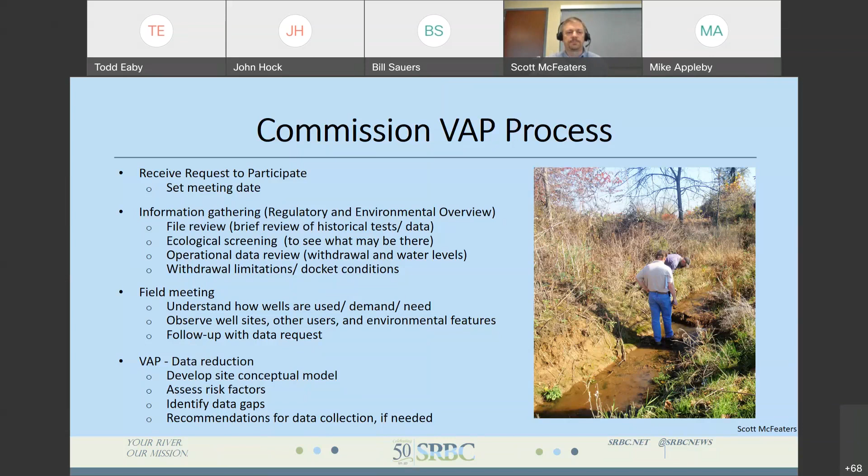So with that, we're going to start looking at some of our examples. We've put together 5 examples we're going to go over in detail today. We'll have about 8 slides for each of these examples in a similar format, to try to get you to think as we go through them. The first slide for each example is just some high-level stuff that we look at as we're beginning to prepare for the action plan development.

Site one, well one, was approved in 2008 at a withdrawal quantity of 130,000 gallons a day. From the initial information, this well is within an SRBC water challenged area. If you're not familiar with that term, we have a groundwater management plan that identifies water challenged areas and potentially stressed areas, because there may be some limitations to developing water. Unfortunately, this site does fall within one of those categories. It's just something we need to be aware of as we start this project.

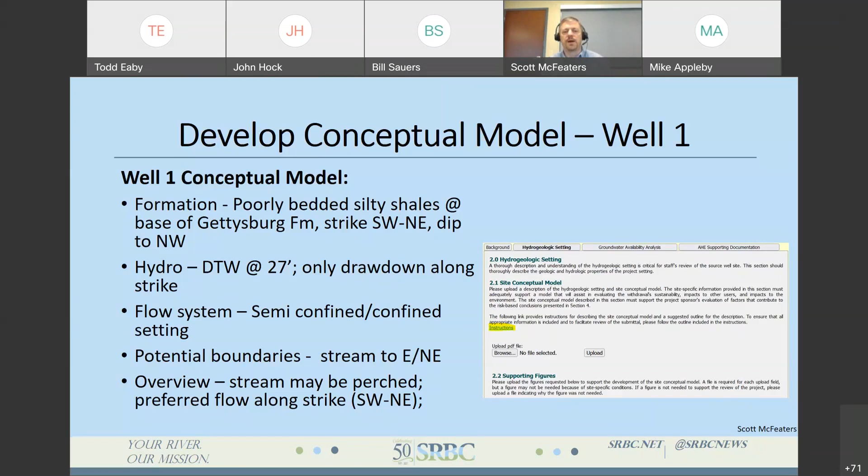As far as the flow system, it's important for this site to know that it was a semi-confined to confined setting. And we do have the potential recharge boundaries with the stream. So overall, we're just starting to develop our conceptual model, and that's important information to know as we dig in to

answer our questions. So the first risk factor we're going to take a look at is the sustainability of the withdrawal. And the first part of analyzing that is to look at a desktop groundwater availability analysis. And as I indicated earlier, there was one found in our historical files. So what we did is we pulled that information up, and we wanted to confirm, look at it, see if it still makes sense. And the one that was on file identified a recharge area of 0.86 square miles.

And the hydrogeologic report provided a description of how that was developed, and it was a structural basin that was defined by extending the primary water-bearing zone to the surface based on the known dip of the bedrock, and the area of influence was used to identify the topographic drainage that would ultimately be captured by the projection of that zone. So it was a well done recharge area definition, and we considered that to be acceptable.

Recharge rate used by the consultant was referenced in literature. We looked at that and confirmed that that was a reasonable value. And we've also looked at what other users may be within your groundwater contribution basin. The area is not highly developed in the vicinity of the well. There are some other wells, but there's also good coverage by the public water supply.

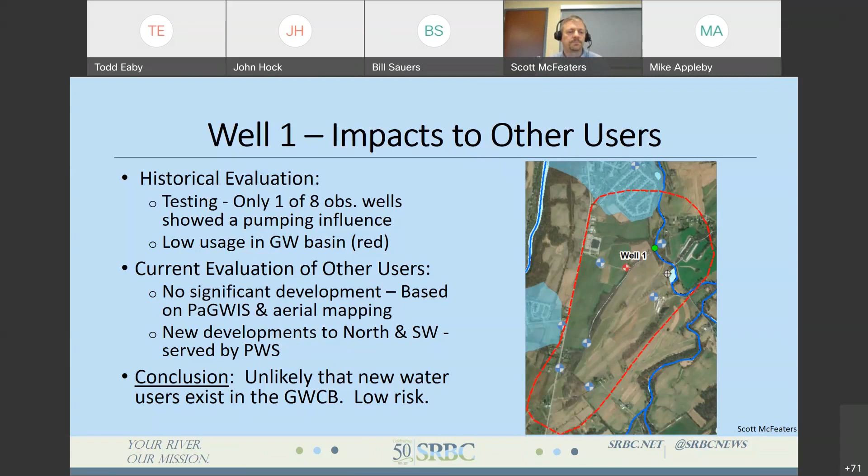So the third principal risk factor we're going to look at are impacts to environmental resources. As I mentioned, there is a stream nearby, there is a wetland nearby. The good news again here is that during that historical test, both were monitored and no impacts were detected. And that's an important piece of information to have as we try to rule out potential impacts to these features.

We also look at the state designations. There's no special protections for either of them. And the third area we check into is the rare, threatened, and endangered species through the PNDI search tool. And in this case, no species concerns were identified. So overall, again, there's a very low risk factor to impacts to the environment based on the information we have available to us.

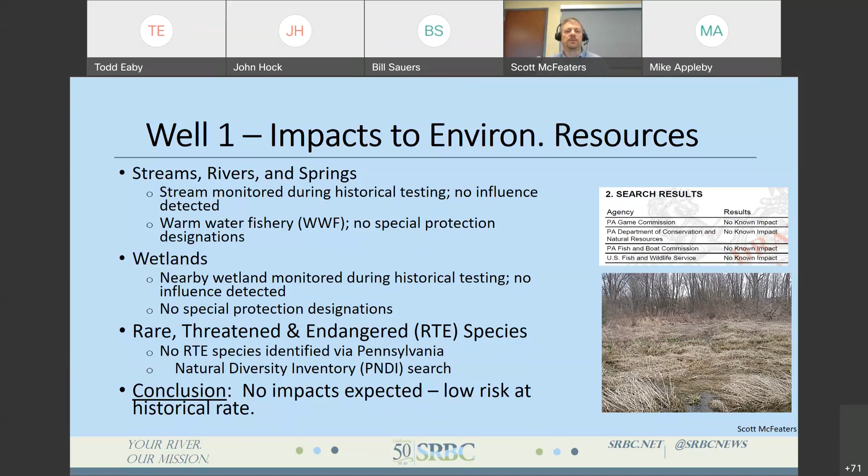So coming to the end of our data evaluation, we put up this summary screen. We've got the 3 principal risk factors. We kind of rank whether we have low, medium, or high risk. For each of these 3 factors, we've determined there's low risk. So what does that mean for a project sponsor? Ultimately, the risks are satisfied with the existing data and no additional evaluation is needed to move forward.

In this case, we'll prepare this action plan, we'll write it up, we'll deliver it to the public water supplier, and they can choose to use our evaluation as their AHE. So no additional work would be needed, and they can just submit that to us as part of their renewal to satisfy the AHE requirement. So that's a good story.

You know, these action plans can come up with different conclusions. As Mike and I talk about these different sites, I'm going to progress from what I'll refer to as a clean action plan, where the data supports the previously approved quantity, to, you know, messier action plans later. But we're going to go on to the second one at this point, and you're going to hear some similarities in this one, but there is a difference in the conclusion we come to, and we'll talk about that in a few minutes.

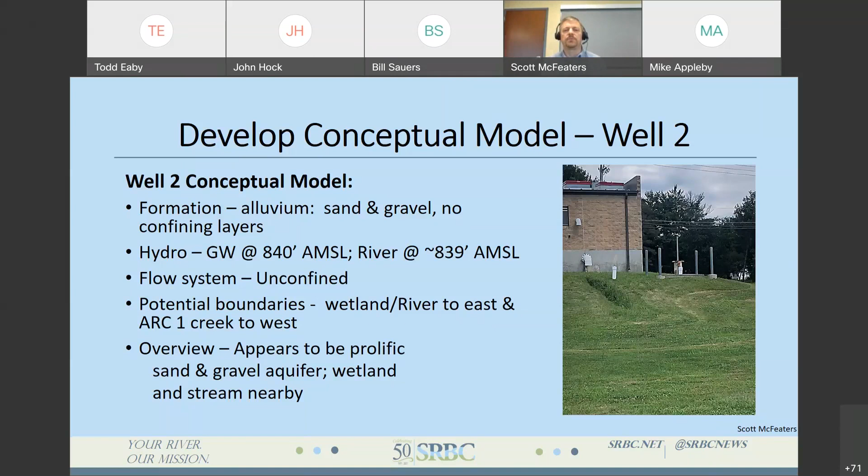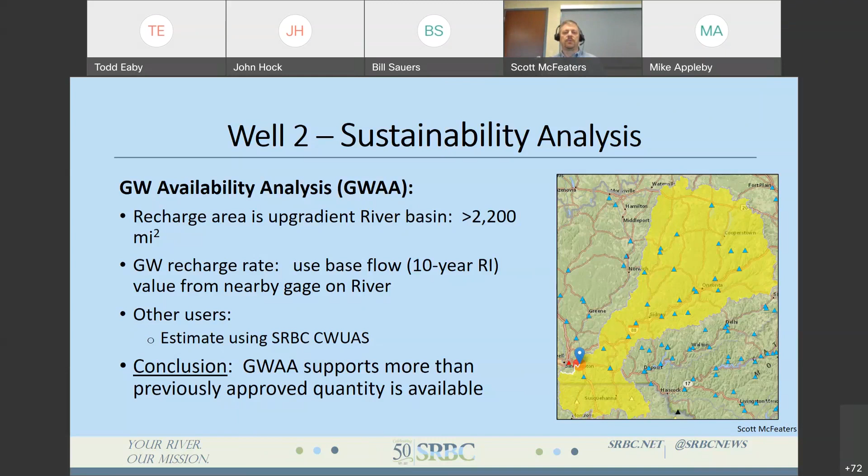So looking at the sustainability question, we'll look at the desktop study, the groundwater availability analysis first. And I'm not going to actually spend a lot of time talking about this. As I said, it's close to the Susquehanna River, so there's a large upgradient recharge area. We also used a groundwater recharge rate that was derived from a stream gauge that was on the river. Ultimately, the conclusion that we come up with is there's a very low risk of this withdrawal not being sustainable, and in fact, there's probably far more water than the 350,000 that was previously approved. So sustainability is looking good based on that.

So then we're going to dig in and start looking at the drought data too. And a similar situation here with well 2 compared to well 1. We don't have a lot of drought data. There's actually 6 different drought periods depicted here in the graph, but only one of them did we have water level data available for. And the withdrawal during that drought period did not approach the previously approved quantity. So in that case, again, we're going to shift to the analysis of what the projected drawdown would be at 90 days. I don't know if I explained this earlier. The commission simulates what will happen in a well during a drought by projecting the drawdown to 90 days without recharge. So that's the significance of the 90-day line.

So here in this case, the 90-day drawdown line shows up around 30 feet. Now I'll point out here, and I'm going to come back to this later, but that drawdown level is based on the test data. And if you notice the tested rate there, it was 1,678 gallons a minute. That converts out to about 2.4 million gallons a day. And if you recall, this well was approved for 350. So we'll talk about that significance later.

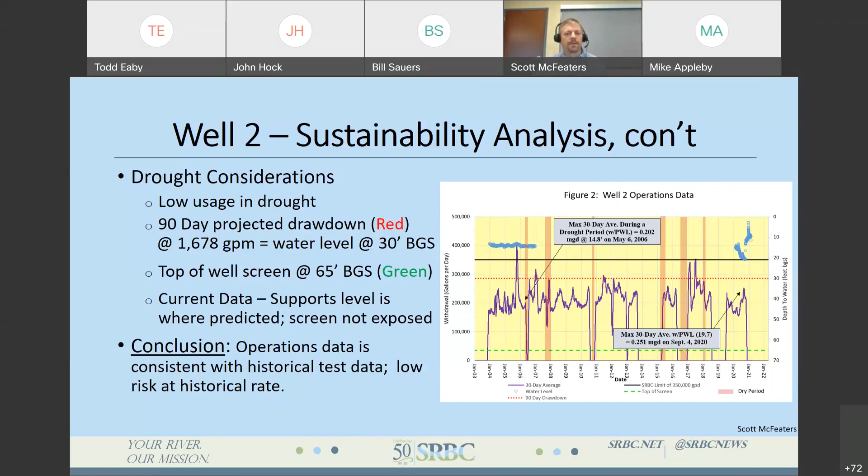So moving on to look at the impacts to other users. So what we did for this well, because we had some observation wells, we were able to put together a distance drawdown graph to estimate the extent of the radius or the area of influence. That information was not provided in the hydro report, but we were able to use the data provided to come up with our own. And in this instance, again, a very good aquifer. The extent of the drawdown was only to about 200 feet.

When we look for other users within that area of influence, none were identified. And in fact, the public water service is provided to all residents within that distance and even a further distance close to the well. So the ultimate conclusion here was that there is very little or low risk to other users due to pumping this well.

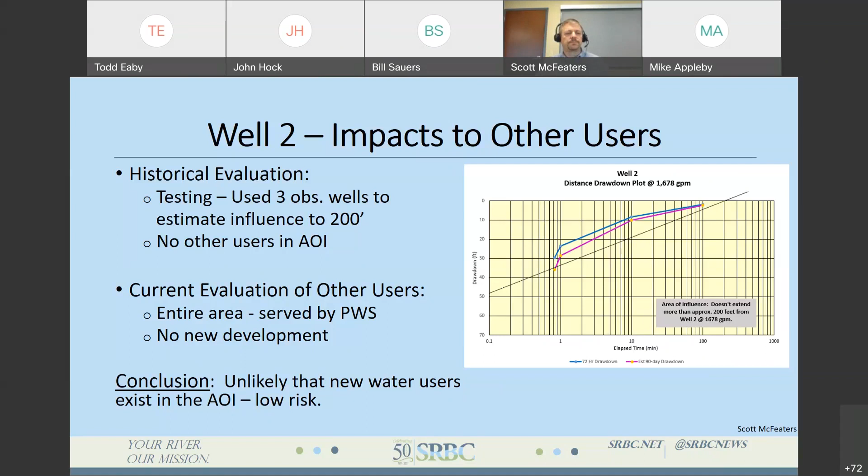The third principal risk factor, again, we would look to address. The challenge that we had was that we did not have any actual monitoring data for the stream and the wetland close to this site. However, as we just talked about in the last slide, we were able to estimate an area of influence which does not extend very far from this well. So the reality is both of these features, the stream and the wetland, are more than 1,000 feet away. If the area of influence is only extending to a couple hundred feet, we don't expect impacts to these features.

The database search with the state did show a threatened species within the river. I believe it was a mussel species. And again, we don't expect there to be an impact to the river. So for impacts to environmental resources, we classify these all as a low risk based, again, on the data and the hydro setting that we're looking at here at the previously approved rate.

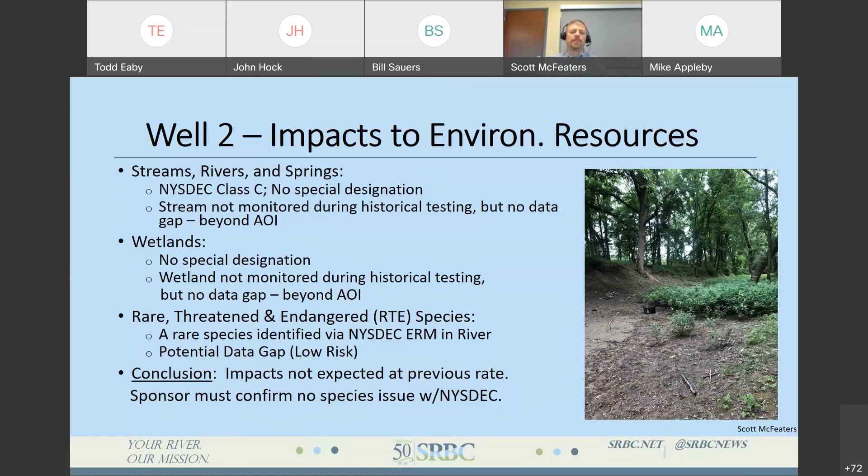So to summarize where we're at as we're working our way through the action plan development, again, each of these categories, each of the principal risk factors, we've identified low risks of potential impacts at the previous quantity of 350,000 gallons a day. So again, the sponsor has the option here to simply use our action plan in the renewal process as their AHE, their alternate hydrogeologic evaluation.

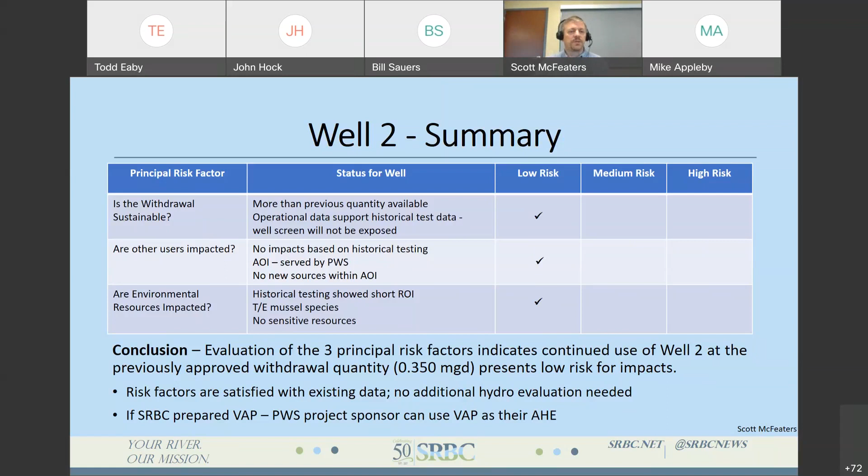Now, I did allude earlier to there was going to be a difference in this project, and we'll move on to the next slide, because the difference comes because as we look at the data, again, we think back to the test, was completed at a rate of 1,678 gallons a minute, which is equivalent to 2.4 million gallons a day, but the project was previously only approved at 350. We do not have records of why only 350,000 was approved, but what we can conclude by looking at the data is that a rate higher than 350 is likely supportable.

So the sponsor in this case has the option to request a higher withdrawal quantity up to the 2.416 million gallons a day, and we will consider that with our evaluation. They could use our evaluation in the action plan. There are a couple caveats I will throw out here just to be aware of. Again, we were evaluating or considering the threatened species at a rate of 350. So since they've pumped close to that rate in the past, we would suspect that no impacts would be realized, but we would encourage them to talk to the agency to make sure that if they wanted a higher rate, that there would be no impact to that species at the higher rate.

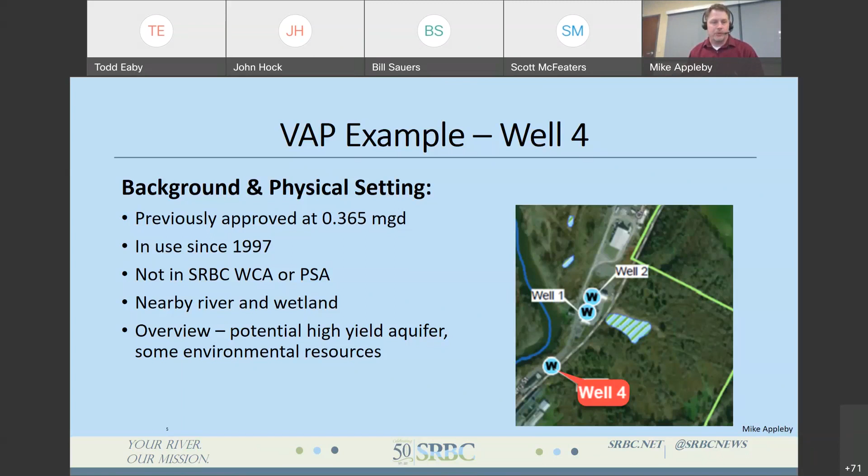From kind of a high level perspective, we came into this project expecting it to be a fairly high yielding aquifer, you know, an alluvial sand and gravel type aquifer, potentially perched wetlands, but those were the types of things that we went into this looking at to see if we needed to evaluate and what the data would end up providing. It had been previously approved at 365,000 a day. So one of the things that we were going to ask the project sponsors is what they really need to get out of the source.

So in preparation for that meeting, we looked at the existing data that we had. And there was a historical 48-hour test. And like some of the other ones, the hydro report wasn't all that complete, at least compared to what we would look at today. So we also had to do a 90-day projection to estimate where that test data would project the water levels to be after 90 days of pumping without recharge.

There wasn't a lot of operational data to compare. It's kind of the similar situation. We have about 20 years of withdrawal data, but only a couple years of water level data. And a lot of that water level data was fairly old historical data. We see a common trend with projects that stopped collecting water level data in around 2007 and 2008. So there's often a fairly large data gap there associated with operational water level data.

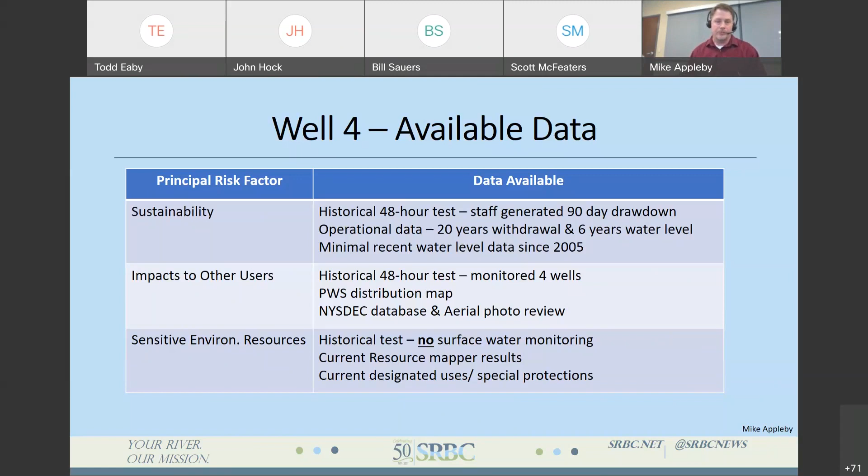There were some wells monitored during that test, so that was a good thing for us to help evaluate the area of influence for the project. The public water supply, again, operates a distribution system within that area. And we also looked at the New York State database to see if there's any other wells nearby. Similar to the other projects, there was no surface water monitoring completed during that historical test. And we also did the appropriate resource mapper and looked at current and designated uses for the wetland as well as the river nearby.

So then we started to get into the conceptual model to assess what we might be expecting with this project. A couple of things that stood out is that it is a significant glacial outwash sand and gravel aquifer, but there's also about 100 feet of clay that was identified in the well log. So that right away is kind of an important signal to us that maybe some of the shallower features that we're normally concerned about are not going to be too much of an issue with this project. That also means that with that level of clay, the aquifer may be confined, again limiting those shallow impacts.

We would expect this to be a high transmissivity aquifer, but the depth to water here was kind of shallow. So even though there is a significant clay layer, we're not 100% sure that the clay layer is that continuous, or if there's some other reason for the shallow depth to water that actually matches some of the water levels within the wetlands that are nearby. So that was something we identified fairly early on and needed to resolve as we worked through this process.

Like the other projects, we looked at groundwater availability analysis. This one came out fairly well, even just looking at a more local basin. So even though the Chenango River was very close, we looked at a local groundwater basin to assess whether or not there was anything that we really needed to look at a little bit more closely. So we ended up with about a 1.5 mile basin, and using the recharge rates for that, there was plenty of resource available to support this at the previously requested rate. So the availability didn't take a lot of time to look at, and we were able to move on from that fairly quickly.

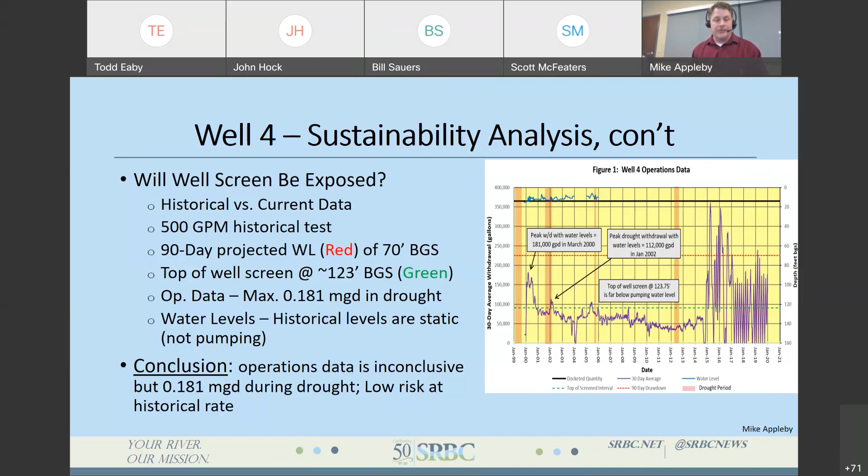So then moving on to impacts to other users. It's a prolific aquifer. The area of influence didn't appear to extend too far. The testing data indicated less than 1,000 feet. That may have been because of the accuracy of the monitoring equipment. I probably would have expected the area of influence to extend further, but there may have been less than a foot or so of drawdown, and it's possible the monitoring equipment wasn't sufficient to capture some of that.

But regardless, the public water supply system covers this area. The other wells that are within the area are owned by the public water supply system, and there wasn't significant enough interference between these sources to be concerned about that. So we were able to move on from that one. Then we looked at the impacts to the environment.

Now, this is another one that comes up because there wasn't any historic monitoring done during that original test. So what we have right now is we can look at this and say, well, the current operations generally look okay. It's meeting its designated uses. I think that this did have an elevated regulatory standard at this wetland. So there is a little bit more attention that needs to be paid to this wetland. So the best we could do here is say there's probably a medium risk.

We would expect that that average use that had occurred a while ago is probably, excuse me. Sorry about that. That historical use was probably okay, but to try to bridge that gap between 181,000 and 365 might be a little bit difficult.

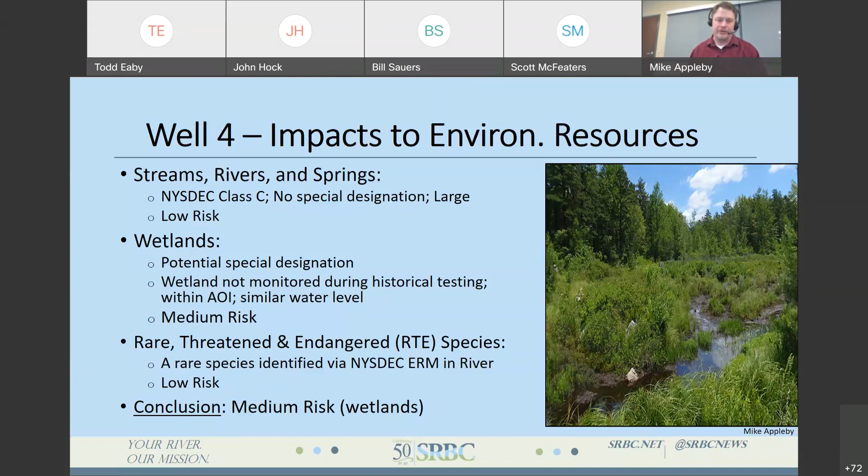Sorry about that. So to summarize this, when we look at the risk potential, at present, at that historical rate, we can probably assess that 181,000 was okay, but we're just not sure because we don't have the water level data. So to bridge the gap between 181,000 and the previously approved quantity, that probably does represent a medium risk. Now that's kind of a guess, but there's nothing there to really support it other than

historical testing. And we know that a lot of wells in these alluvial aquifers lose performance over time. So there might not be a problem with the aquifer, but there could be a problem with well performance, and that would need to be assessed. Impacts to other users is low risk, and then we get back to the impacts to the environment, and that again is low to a medium risk, depending on how the project would want to move forward with it.

So we were able to provide two separate recommendations. The one recommendation was to accept our evaluation, and 181,000 would be acceptable. And if that was okay, then they could use our voluntary action plan as their evaluation and move on. But option two was that if they needed to get more than 181,000, then they would need to do a little bit of additional work.

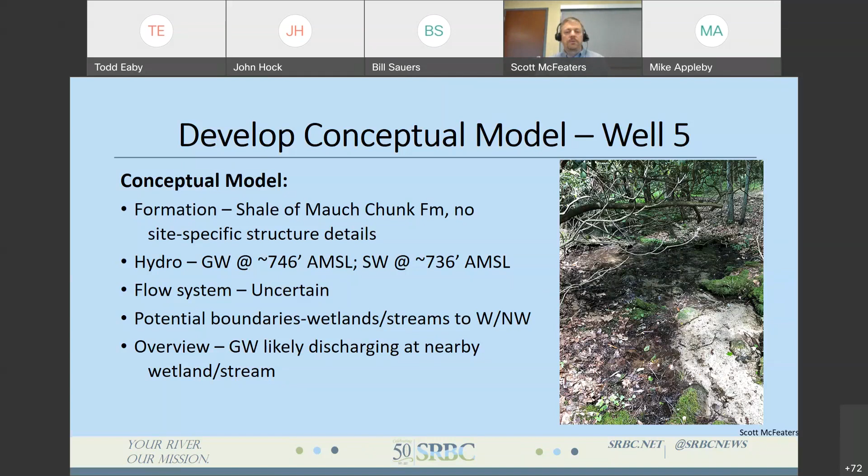So we don't have a good feel for the flow system, whether it be confined or unconfined, but the potential recharge boundaries we identify are wetlands and streams in this area. So again, not the greatest model to begin with, but we're working with what we got at this point.

So we start digging into our 3 principal risk factors. Look at the sustainability analysis. In this case, again, we don't have information on an area of influence, so we're going to make an assumption here that the well is going to intercept flow in the small stream that we have. So if we take the upgradient topographic recharge to a point of impact on the stream, we get about 2.5 square miles. Recharge rate, again, we had nothing to work with, so we go out and we look for whatever literature or resources are available.

And one that we'll often use if there's a USGS stream gauge nearby, they have values for PART and RORA that give you a good estimation of the recharge in the area. So we'll pull that one. We'll typically use the PART value, and people will ask us why, and it's because it tends to be the lower one. But if you actually read the documentation that introduces PART and RORA, there is a reference that RORA tends to overestimate in some cases. So we tend to lean towards the use of the PART value.

As far as other users, the well is located in a rural area, a lot of forest in the groundwater contributing basin, but there are some users out there, so we have a low estimated use. So overall, the picture here, looking at the sustainability from an availability analysis, it looks like there's low risk as far as supporting the previously approved quantity.

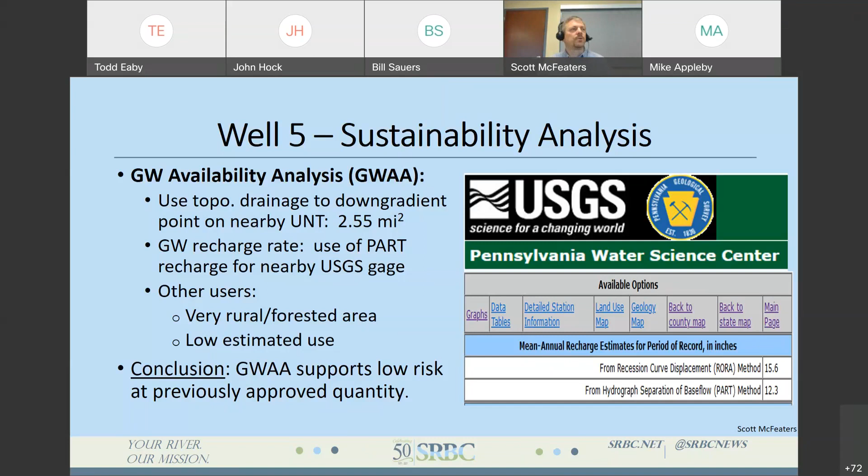Now that brings us to the second part of our evaluation, and this is where some problems arise. So again, we want to look at what's going to happen during a drought to make sure this withdrawal quantity is sustainable. So if you actually look at the early part of the data set we have, the second drought period indicated by the shading, there was use of the well close to the approved limit, and we do have some water level data. However, if you actually look at where that water level is, it's down around 150, 160 feet. The 3 water bearing zones that have been identified in this well are at 60, 125, and 225 feet. So during this drought period, we were exposing 2 of the 3 water bearing zones.

Something that gets more concerning as we look at this, the red line, again, towards the bottom of the graph, is the 90-day projected drawdown, which comes in at a depth of 254 feet. These data suggest that the water level is going to drop below all 3 water-bearing zones. So it's really not a sustainable situation. And to top things off, if you look at the life of this data set, the water level from early on to most recent, which is 2021 on the right side of the screen, the water level stays fairly consistent around 150, 160, which again is below 2 of your water bearing zones.

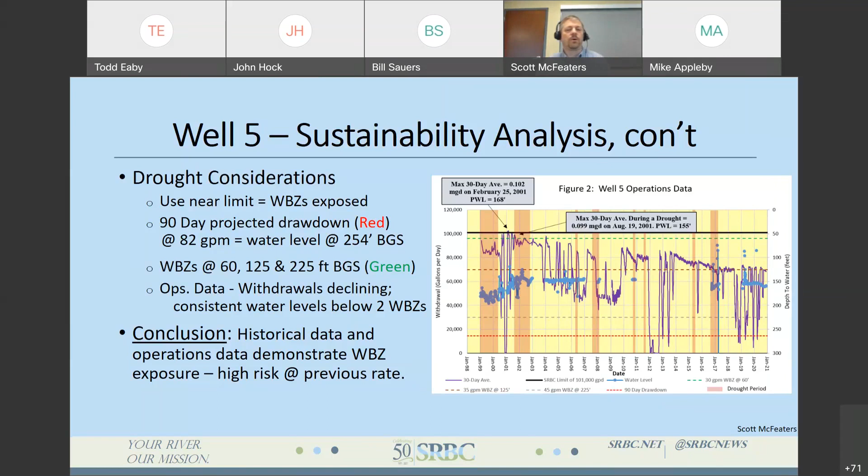So we'll move on to look at potential impacts to other users. Again, it's a fairly undeveloped groundwater contributing basin to this well. You see a screenshot there on the right. The purple is outlining the contribution area. A lot of trees there in the southern half. But if you do look closely, there are about a half dozen residents within maybe 2,000 feet radius of the well. Again, if you recall, we did not have any monitoring network during the testing, so we do not have a good idea of what the area of influence of pumping this well is. So we can't say at this point if any of those residents are truly going to be impacted by the pumping of this well.

So again, the conclusion is that there doesn't appear to be a lot of users, but there are at least a half a dozen, and if you're one of those half a dozen, you're going to be concerned if this withdrawal is going to impact your well. So we're going to list this as a medium risk, something we need to be aware of, but something we can't just overlook.

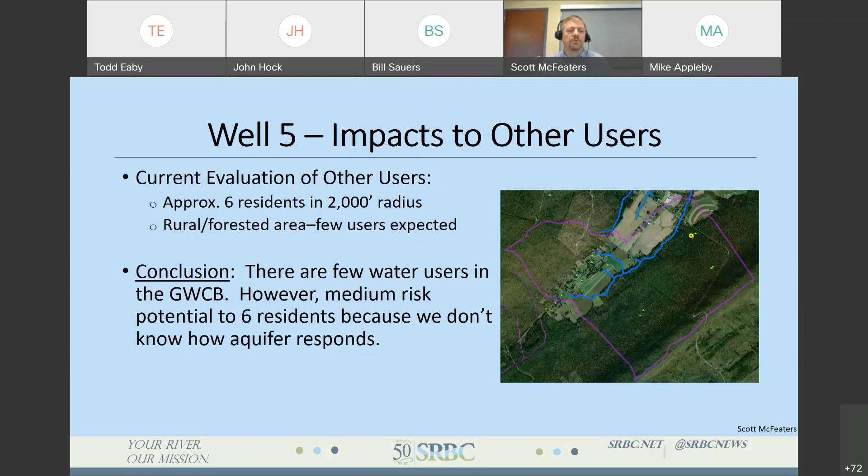So it takes us to our evaluation of impacts to the environment. Again, as I said earlier, the 72-hour test did not include any monitoring of springs or wetlands. So that's going to be an issue here, because you pump this well, we don't know what's really going to happen. Is there going to be pumping influence to this small UNT stream? Is there going to be impacts to the wetlands? So we're going to flag those as data gaps. I guess the good news here is there's no special designations. It's not a trout stream or anything, but again, we just don't know if the withdrawal is going to be impacting these surface water features.

As far as RTE species, the PNDI evaluation did have a hit as far as a conservation measure for a timber rattlesnake. So we're not going to consider this a data gap. Again, it's a conservation measure. There's some recommendations, but the withdrawal is not going to impact the habitat for this species. So ultimately, the conclusion here is that there is going to be a risk to the environmental resources because we just don't know what pumping that well is going to do to the stream or the wetlands.

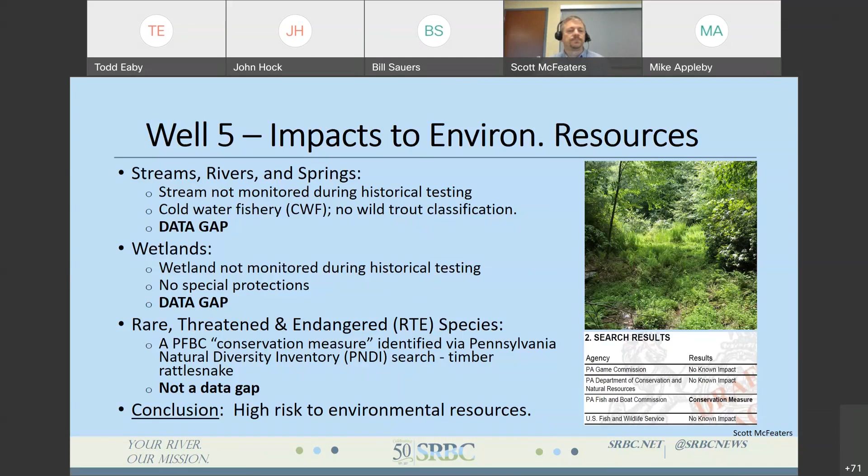So when you look at this table, it's not as friendly as some of the earlier tables. You know, there is a high risk to the sustainability as we presented. There's a high risk to environmental resources based on the fact we don't have any testing, monitoring during the testing. The other users, again, not a lot of them, so we rank that as a medium risk, but there are users out there that could be impacted.

So the conclusion we come to is that we cannot use the existing data to support renewal at the rate of 101, which brings us to, well, can the data be used to support any quantity? And the concern we really have here when we look at the drawdown data was the exposing of the water-bearing zones and the declining yield in that well.

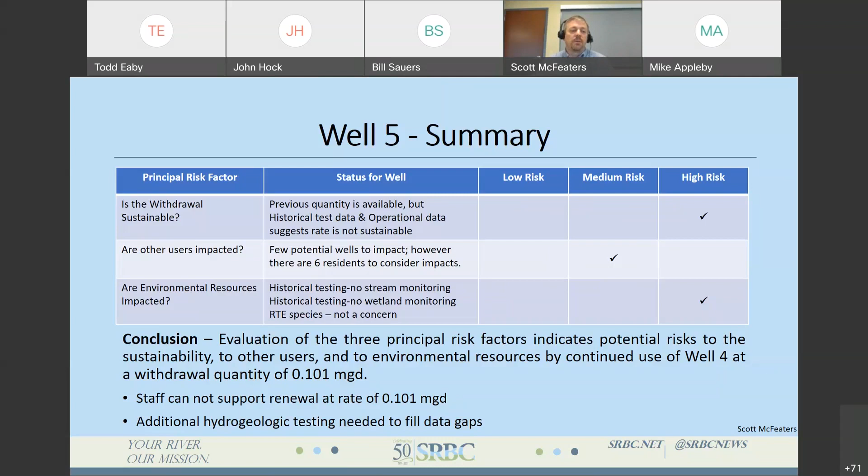We don't know that we can use the existing data to come up and recommend any specific recharge or withdrawal rate for this well. But what guidance can we give as part of this action plan? So that will take us to our next slide here.

Ultimately, there's a three-step process we recommended for this project sponsor. Some further evaluation is definitely needed here for this well. Going to need to do some short-term testing or potentially some well rehabilitation work to be able to identify what you think a sustainable rate is. Ultimately, then you would discuss the results of that with your consultant, or even give us a call. We'll talk you through it.

But we're going to need to see then step two, some longer term testing at that proposed rate to fill in the data gaps, because we still have the data gaps we identified with potential impacts to the stream, potential impacts to the wetland, other users out there that we don't know if are going to be impacted, and the big one here is we really don't know.

We're seeing the water-bearing zones being exposed, and we believe that's causing a problem. What are you going to do? Will the rate you're proposing be protective of those water-bearing zones to make sure your withdrawal is sustainable?

Ultimately, once that additional testing is done, that information will be used in step 3 as part of your alternative hydrogeologic evaluation to be able to answer the 3 principal risk factors and identify what a rate is that will be protective of all those features that we typically look at. So at this point, I'll pass it back to Mike, and he will share our final example with you.

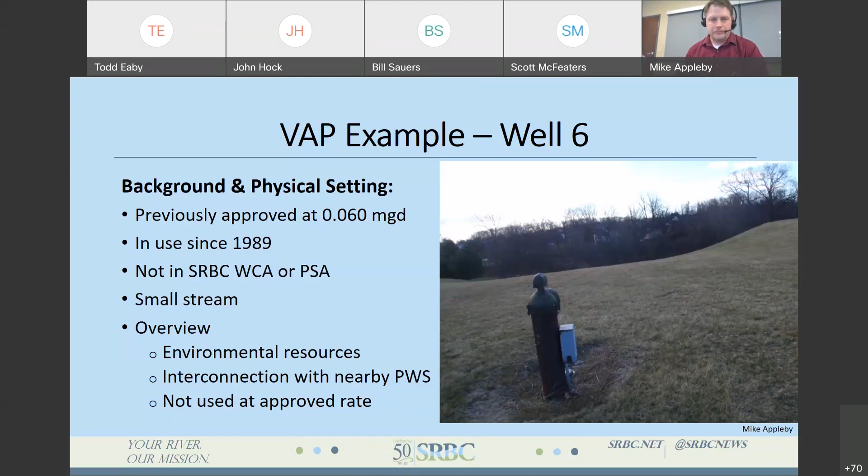Just from a background perspective, it was a 60,000 gallon a day well that was approved in '89, and has been in use since that time. There is a small stream nearby, but there's really no other sensitive environmental features to be too concerned about. The available data that we have was a historical test, but it was a constant head test. So it was kind of unusual to see a constant head test done.

And this was one of the last wells developed of a group of wells. And the other wells that they have are actually fairly similar to this one also, that they're relatively low capacity, small and medium capacity sources that once the drawdown hit an important water bearing zone, the water levels would start to decline rapidly. So I think they switched from doing constant rate tests to constant head tests to try to assess whether or not maintaining a specific withdrawal rate through a period of time was going to work out.

So what they ended up recommending in that original test was a withdrawal rate of 61 gallons a minute. Now, obviously, 60,000 a day is not the equivalent of 60 gallons a minute. So what we ended up approving it at was about 41 gallons a minute. So we reduced it further than what those recommendations were at the time. We had some operational data, but again, like the other projects, we had a long period of withdrawal data, but only about 8 years of water level data.

What makes this project a little bit different is that the operator developed an informal operations plan. So they recognized that water levels would decline very quickly when they hit certain levels. So as they started to approach those levels, they would start to reduce their withdrawals. And that was a very astute observation, and it was good management of that resource to recognize that they needed to cut back to make sure that they weren't causing any kind of harm to that well.

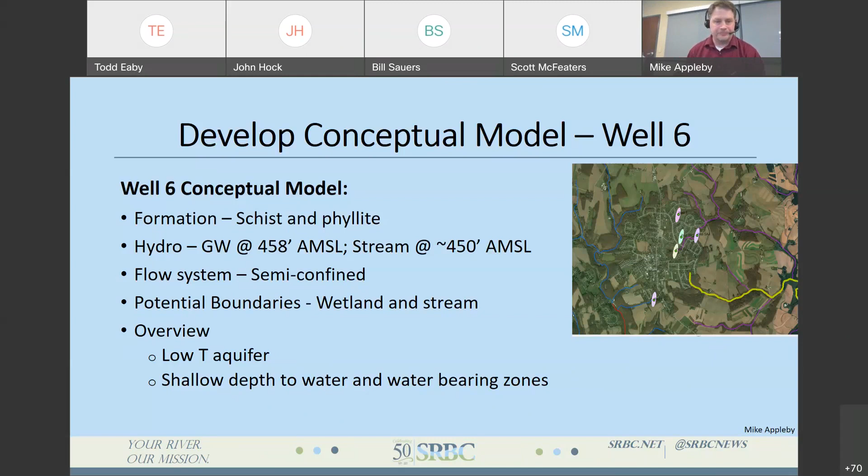We looked at the groundwater availability, and surprisingly in these areas, the recharge rates are a little bit higher than you might expect. I think what happens here is that the saprolite is fairly thick, so it's able to absorb some water and then it slowly discharges it, so it can help support base flow during lower flow conditions. But you're still dealing with a low transmissivity aquifer.

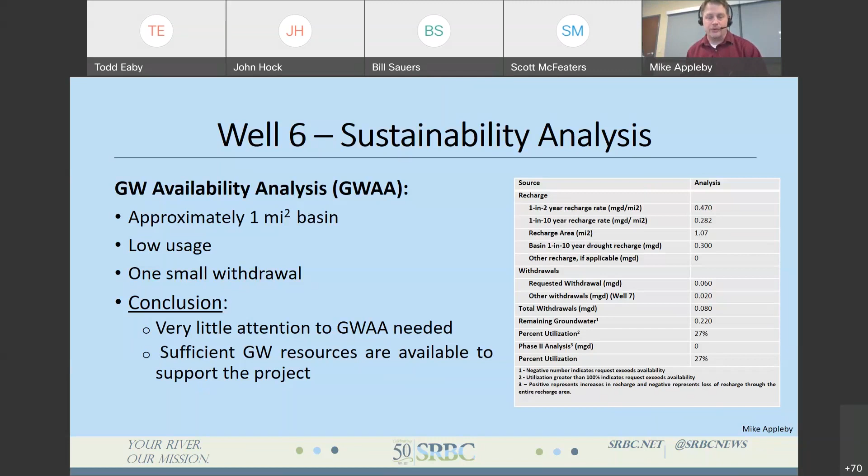So overall, the groundwater availability was there to support the previously approved rate at 60,000 a day because there weren't any other significant withdrawals within this basin. There's only a 1 square mile basin, but it's not like we're looking at a carbonate aquifer and a high transmissivity well that could possibly do as much as 1,000 gallons a minute, even though it might be a small basin. There is sufficient resources to support this.

for a long-term rate. But then they started the constant head test out at 91 gallons a minute and ended up at 65 gallons a minute by the end, and then recommended that 61 be approved as a sustainable rate. Then when we started looking at the operational data, it really started to demonstrate an entirely different story.

So we're starting to look at this, and this is establishing some real concern for us. And as we're evaluating this well, we're trying to balance what they've been using, which is about 50,000, compared to what the operational data seems to indicate as being sustainable, which might be 30,000 to 15,000 because of what they've done during drought periods.

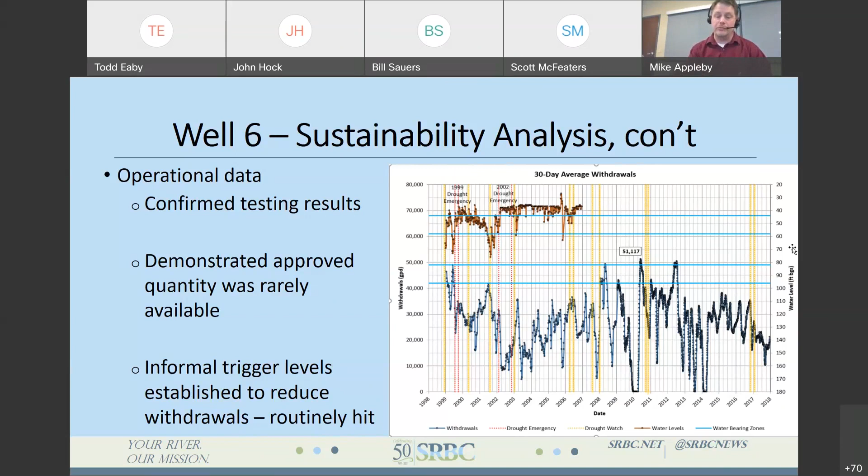You can also see that during this period of record, their withdrawals have changed significantly. They bounce around quite a bit, and that's most likely because the project sponsor recognized the value of some of those shallow water bearing zones and tried to maintain water levels above it. So they responded appropriately to what they were seeing with water levels in their well, as well as the production that their well was providing.

So what do we do about this for sustainability? The historical testing data isn't great. It probably suggests that a lower rate should have been approved. We did approve a lower rate than what was tested, but the operational data seems to indicate that for sustainability purposes, something even lower should be considered.

There really wasn't anybody around to be impacted. Everybody was within the public water supply system, so we didn't spend a lot of time on impacts to other users. And really the same thing with impacts to the environment. There was a very small area of influence, and the surface water feature was actually outside of that. So we were able to get past those fairly quickly.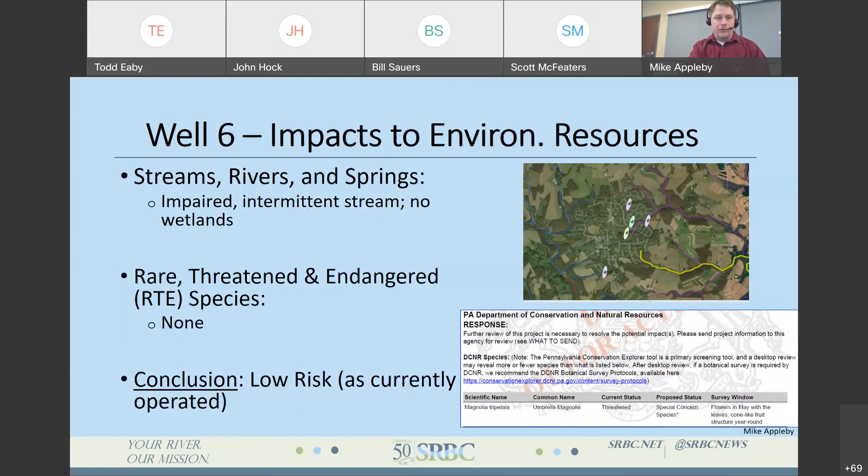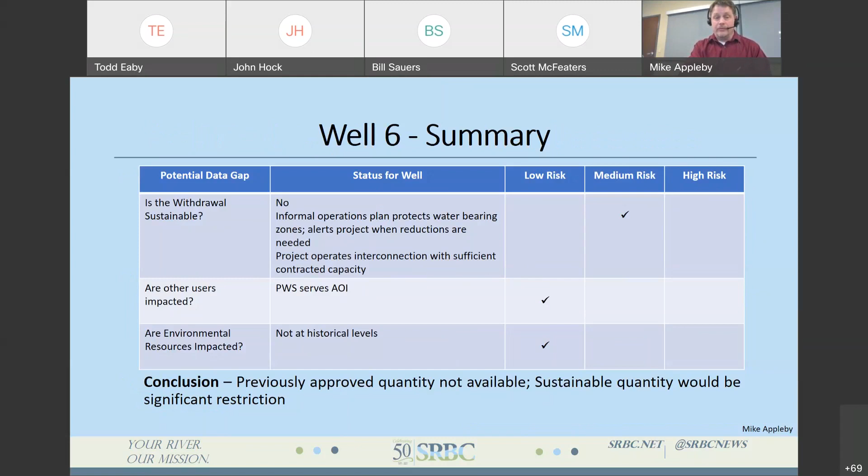So the summary with this one comes down to the withdrawal at 60,000 a day isn't sustainable. The operational data indicates that even 51,000, which was their maximum, isn't sustainable. So we need to figure out some way to work through this. To do that, we recognized what the project has been doing. We would recommend that they formalize their operations plan.

But then we also had to recognize that they have a connection with a public water supply system with an appropriate capacity to offset the losses from this well and the other wells within their system when the resource isn't available. So they planned appropriately, obtained the other sources that they need, and so they utilize this source and their other wells when the resource is there, and when it's not, they utilize that interconnection.

So we needed to recognize that as part of this project. So we actually recommend approval at a rate that wasn't sustainable because they had sufficient resources available to make up for it. And the project was operating the well appropriately. So it seemed to make sense to recognize that.

So this is one of those odd cases where there's a data gap. We're recognizing that there's a potentially medium risk for one of those risk factors, but there's no data that they would be able to collect that would actually fill that gap in. They have all of the data. We know that there's already sustainability problems, so we're not recommending that they collect any additional data. So this is one of those cases where they've got everything that they needed.

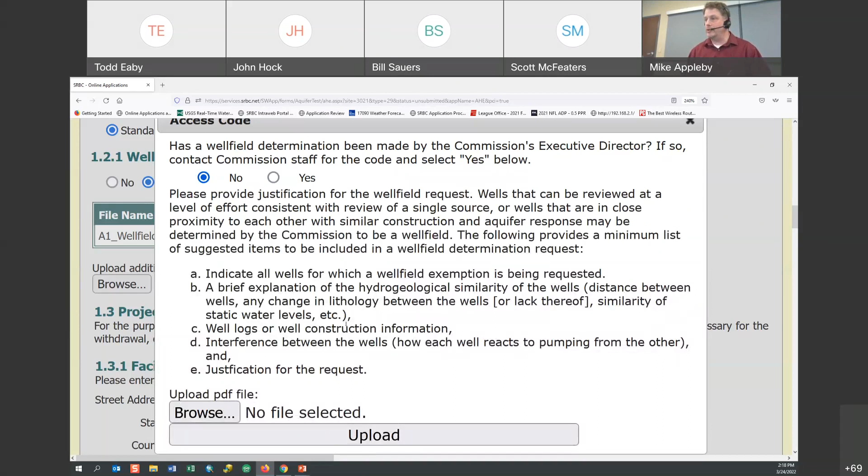If you do have a well field determination, we can provide you with an access code to zero out the invoice for this. Most projects at this point probably don't have the well field determination, then you would need to provide an upload, and that's generally what it would look like. So moving down through this kind of quickly, a couple of uploads you'd have: facility location, project narrative.

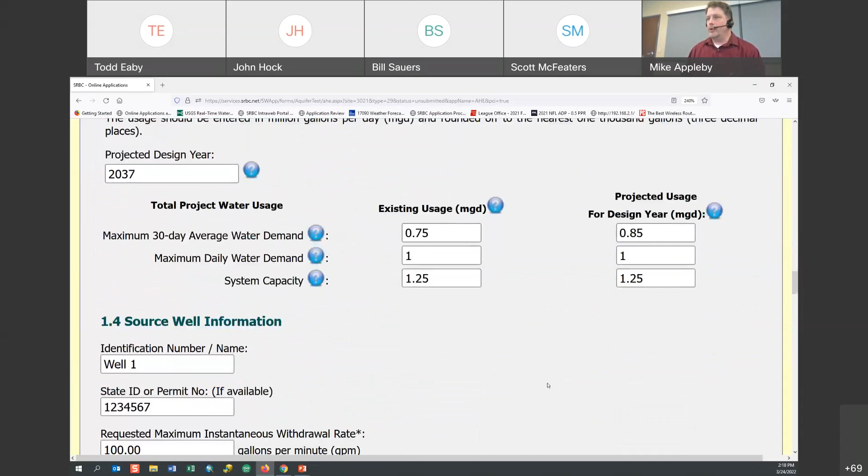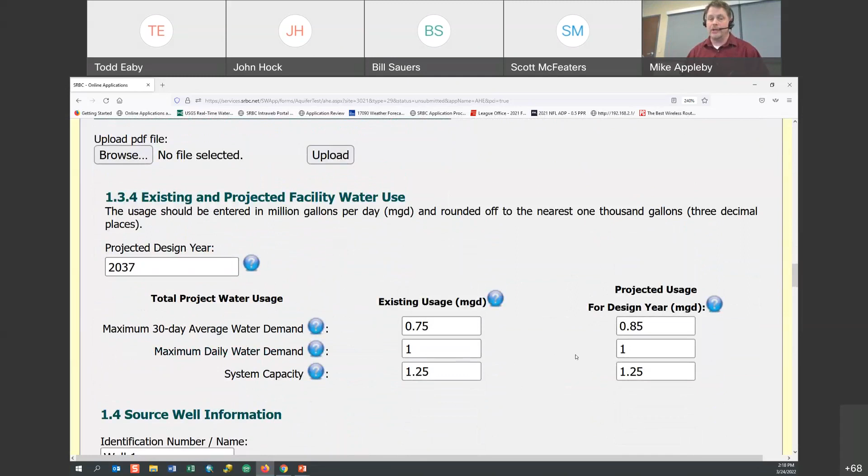I did want to talk about section 1.3.4 here a little bit, because this is the overall facility use. So this is about the entire project. So it's not just about the one source that is the subject of this form. It is about everything involving your project. Then we ask for specific information about the source here in section 1.4.

What we often see is a confusion between 1.3.4 and this section, where people are putting in the same information, or they might have it inverted, where we're getting the total facility location or project information here instead of just the source itself.

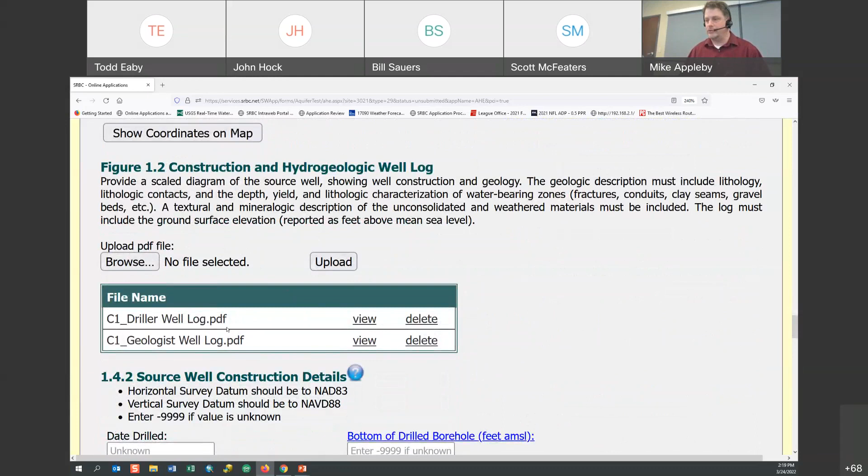Moving down through this, a couple options for well construction logs. You might have the driller's log and the geologist log. If you don't have both, one is fine. If you don't have either, you can upload a statement that says that no well logs are available for this project.

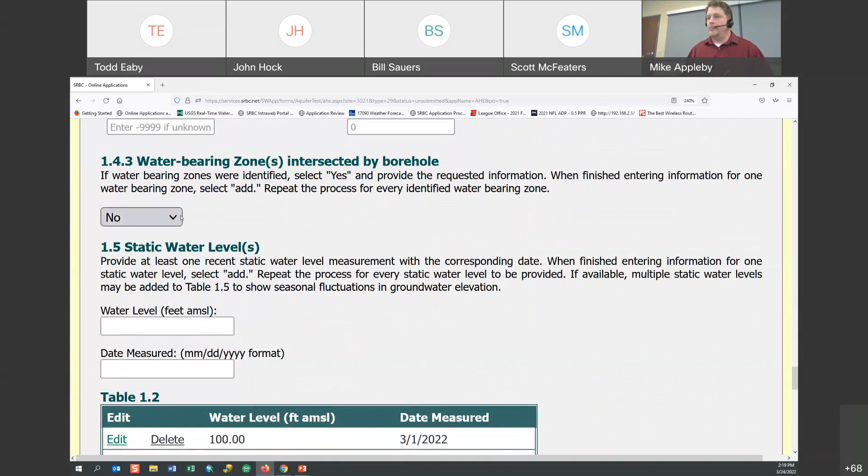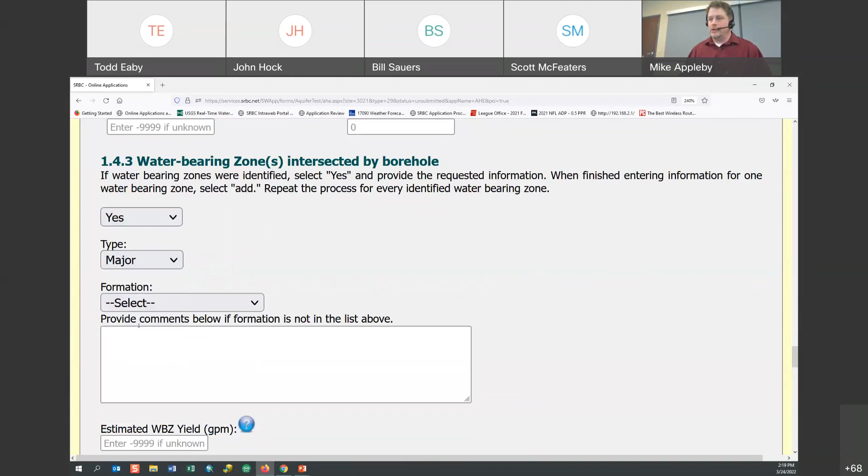Wanted to bring attention to some of these selection boxes here. So for the water bearing zone, it's not always intuitive to people about how to work through this. So as you work through it, you enter the appropriate information about what the water bearing zone is. And then as you get that information in, you hit add zone. And you'll end up with this table starting to populate here that actually starts to summarize some of that.

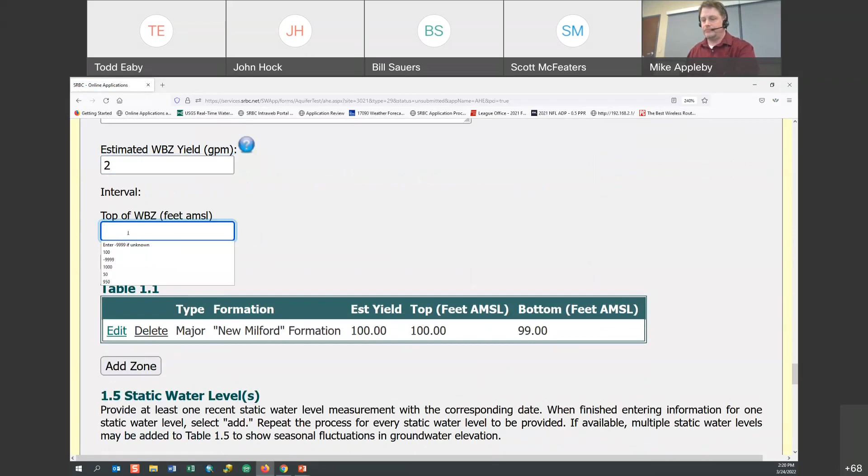If you need to add another water bearing zone, you just come up to the top here and start entering in information for that second zone. And then once you hit add zone again, you'll see that pop up. And it's a similar thing here for the static water levels. So you see there's a couple that are already entered here. And if you need to add another one, you just enter that information and move on.

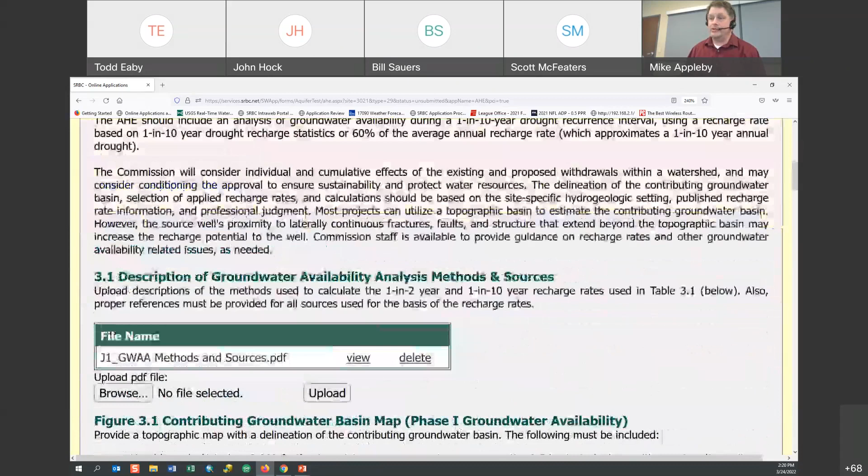Moving into the groundwater availability analysis section, this is something that most people should be familiar with. This is very similar to what we've had for many years, so I'm not going to go into this in any detail. What I do want to point out is this plus button down here at the bottom of it. When you hit that, you'll get another row. So if you find yourself running short on rows, hit that plus symbol and you can get another row to enter.

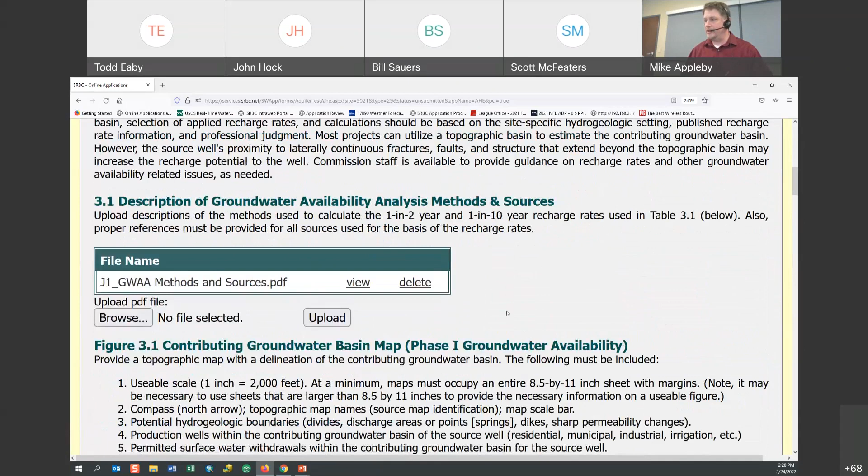Most of what you're going to be doing within an AHE is going to be in section 4. This is really the meat of everything. So I've provided a couple of example uploads that you might have throughout each of these things. Generally speaking, section 4 is going to provide us with all the information that you've used to assess that the project is at low risk for all the risk factors and allow us to come to the same conclusion that you're reaching. So this is where you're going to provide all that data.

You get the rare, threatened, and endangered species. You do those in environmental surveys. Make sure it's signed when you upload it. And then if there's any agency responses that are necessary, you can put any correspondence that you've had with those agencies, or if you don't have a resolution of some of that yet, you can upload a statement that indicates as much.

Working down through the environmental resource assessments, we're looking for an environmental screening here. So this is your summary of what is within the area, and you can start your assessment of impacts to those here. You can provide some data if you'd like to, or you can address that down here in each of the risk factors. So very quickly, we have some examples of what might be provided. At a minimum, each of these sections should contain some kind of summary for that risk factor that indicates why this is or is not low risk.

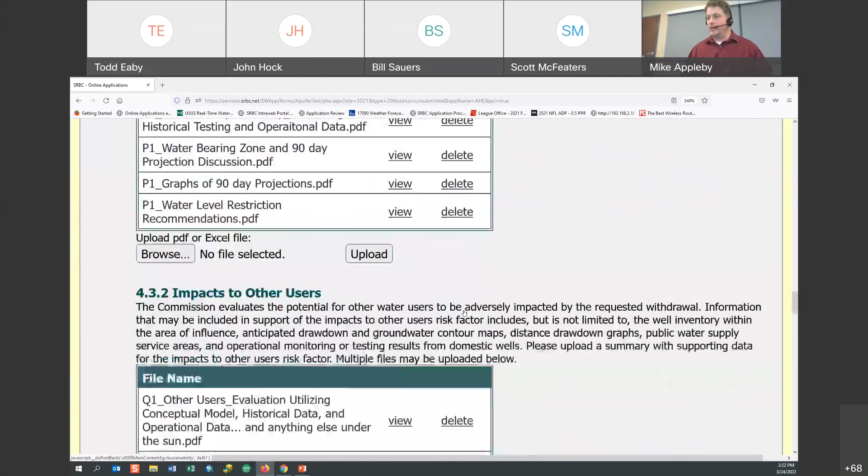If there is higher risk, hopefully you've either done some kind of operational testing and you're going to include that as part of this summary, or you're going to provide some recommendations about how to deal with the risk. And it may be that, for example, it impacts the other users. You would end up with a mitigation plan and say, well, we've only used the well at 181,000. We really want the 365,000, but we think there might be a problem with this nearby well, so we'll drill them a new well, and we can deal with that part during the application. So there's ways to manage some of those things.

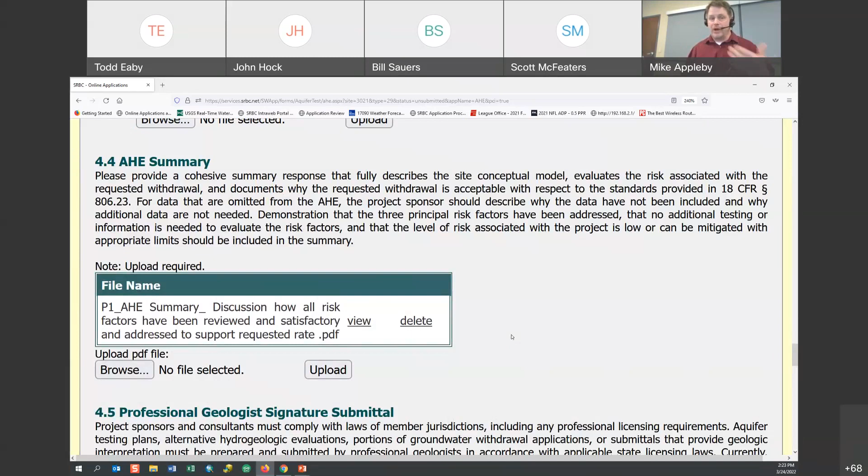Similarly, with impacts to the environment, you're uploading these materials. Finally, what we're looking for here is the AHE summary. It is what it sounds like. It's a summary of what you would expect to see of your conclusions of the AHE analysis. And hopefully at this point, by the time you're uploading this and getting ready to submit, you've got everything completed so that there's no risk, or you're able to mitigate all the risks associated with it.

Section 4.5 is a new section that gets us the professional geologist signatures. So what we've been dealing with over the years is kind of spotty compliance with Pennsylvania's and New York's geologic requirements, where you're supposed to sign and seal all the documents. And that's been happening in some cases and not in others. So we took a step here to kind of universalize all of that. This is going to be a required field when you're initially submitting. So you fill out who you are, stamp it, if you're in New York or Pennsylvania. Maryland does not require this yet. And finally, then we have some miscellaneous uploads that you can do.

I want to mention that our next public water supply assistance program offering is what we're expecting to be a consultant workshop. This is going to be an in-person workshop here at the commission office. We're looking for probably 25 to 30 people in more of a classroom style, where hopefully we can take some of these action plans that we've worked on and provide these as exercises to people that attend, so that they can actually work through the project, see what we see, and see how they come up with something. Maybe there's some different ways of evaluating it we didn't consider. So we're looking at a half a day for that. We are hoping to get New York PG continuing education credits for that. That's a new process to us, so we haven't worked through all the details. It's not a guarantee at this point, but that's what we're hoping to be able to do.